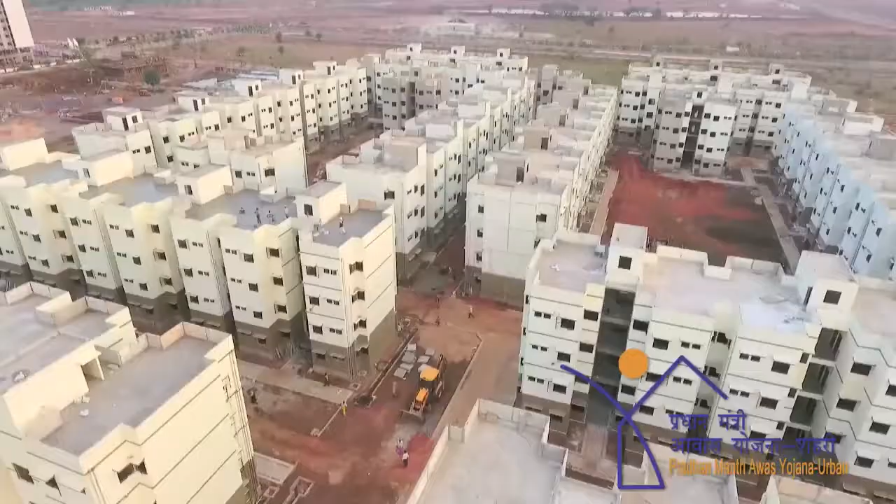The Pradhan Mantri Awas Yojana Urban and Pradhan Mantri Awas Yojana Gramin have been initiated for urban and rural areas respectively by the Union Government, with a mission to fulfill the dream of the Honorable Prime Minister of India to provide a decent 2-room Pakka house with electricity, water and toilet facility to every household of the country by 2022, the 75th year of independence of the country.

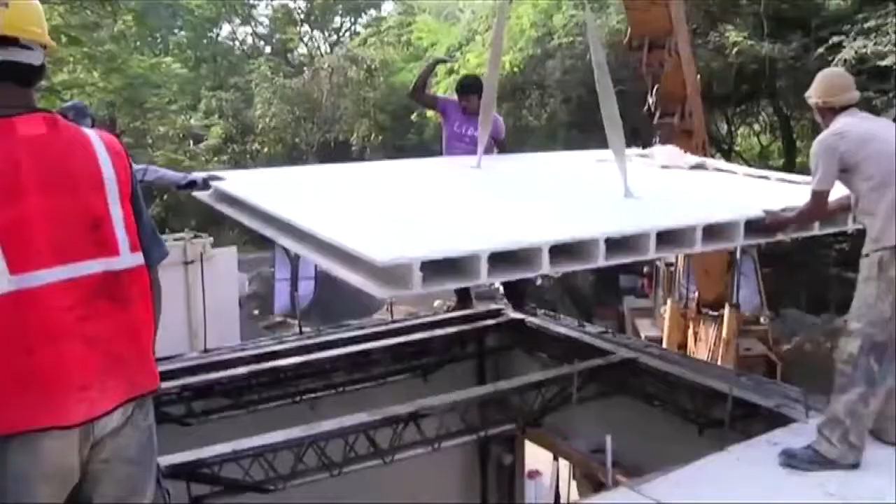This challenging task requires an integrated approach to deal not only with land, finance, regulatory mechanism, but also use of appropriate building materials and construction practices so as to ensure fast-track delivery of affordable, quality and durable houses.

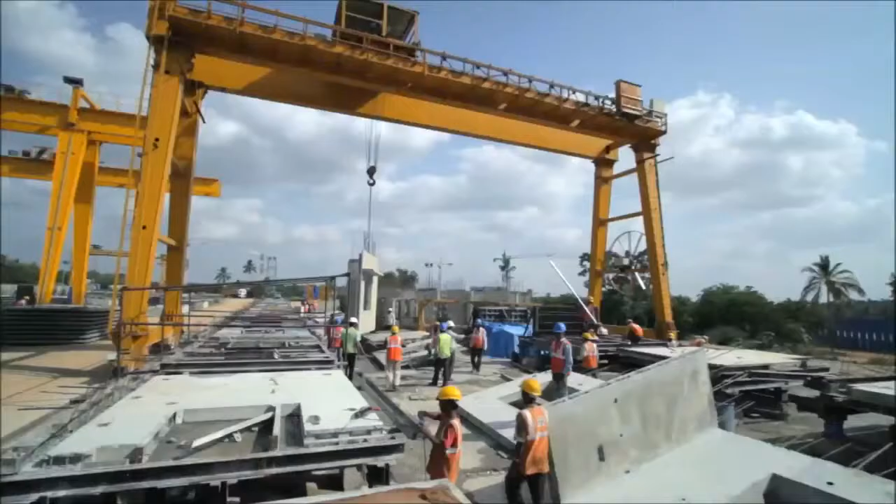A number of alternate construction techniques and practices showing potential for mass housing construction, evaluated and recommended by Building Materials and Technology Promotion Council, are being used in construction of houses in different parts of the country. Monolithic concrete construction using modular formwork system.

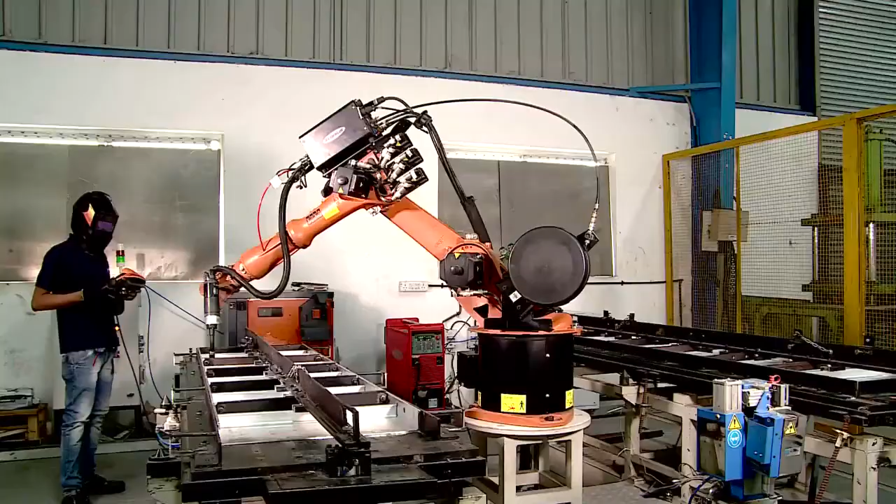One such technology is monolithic reinforced concrete construction using modular aluminium composite formwork system. Originated from Malaysia as Mivan Formwork, it is now being manufactured in the country and also imported by many agencies in the country. Aluminium formwork is the most widely used formwork system globally for a wide range of construction practices.

The system is used for forming cast-in-place monolithic reinforced concrete structure of high-quality standards with rapid construction cycles. The system enables one to cast walls, beams, columns, stairs and deck of concrete home in one continuous pour. The windows and door openings are cast in place simultaneously with the walls and ceilings.

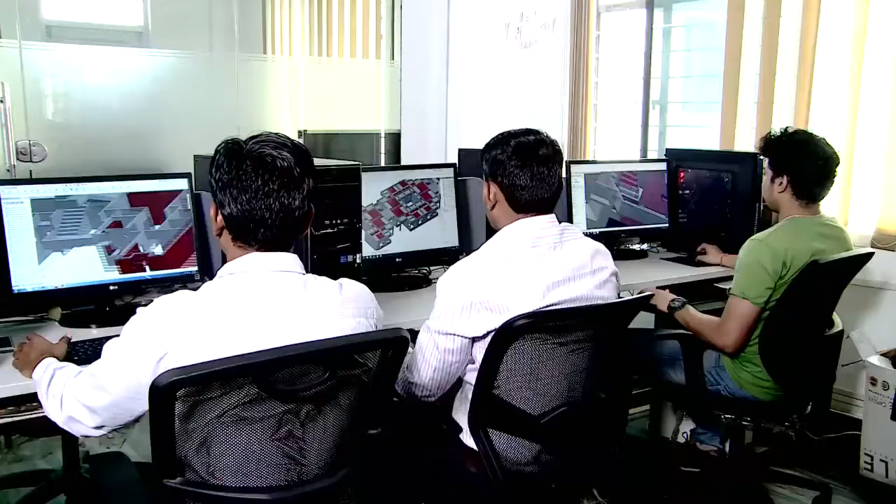MEP services can be placed into the walls before pouring of concrete, preventing the need of additional framing in the interior of the building. The structure is designed as RC load-bearing shear walls and slabs. Monolithic casting of slabs along with RC walls results in box-type structure, which is very strong and resisting horizontal forces due to wind and earthquakes.

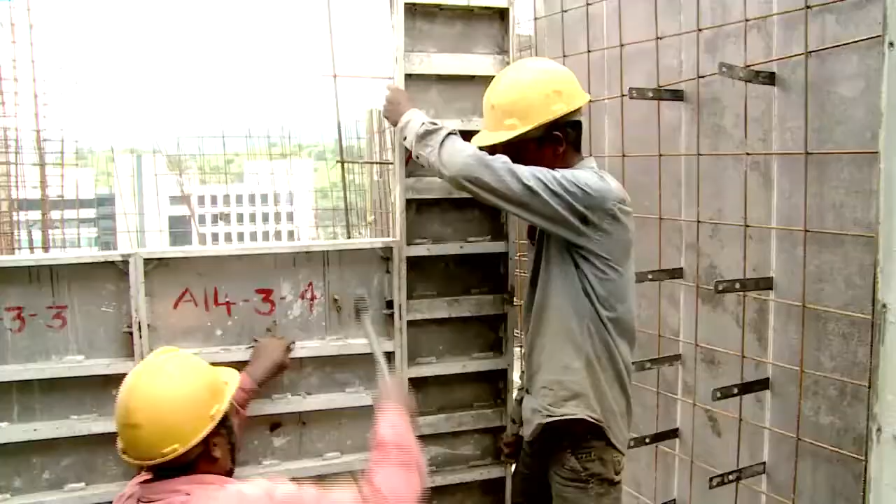The engineered formwork system is designed based on the drawing of this structure and manufactured in the factory. While transporting, all panels are clearly labeled for easy identification on site and smooth fitting using formwork modulation drawing. The basic components used are panel, extruded aluminium or composite rail section, welded aluminium composite sheet made of high-strength aluminium alloys with 4 mm thick skin plate and 6 mm thick ribbing behind to stiffen the panels.

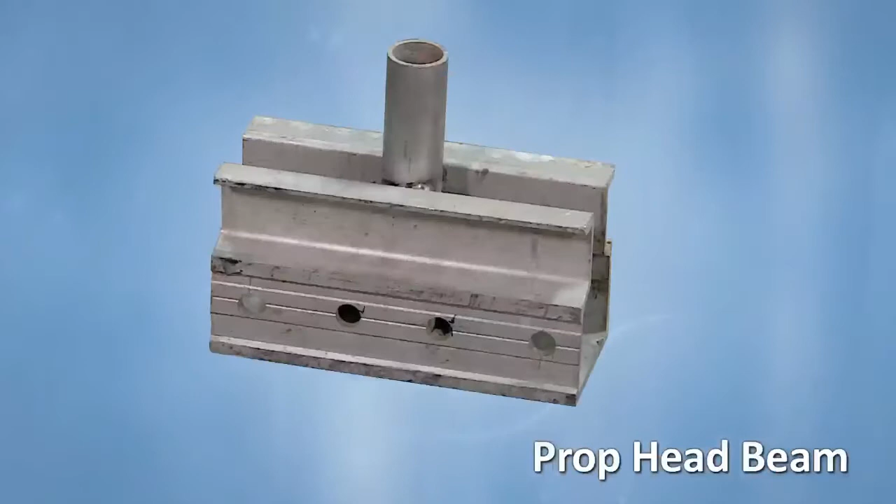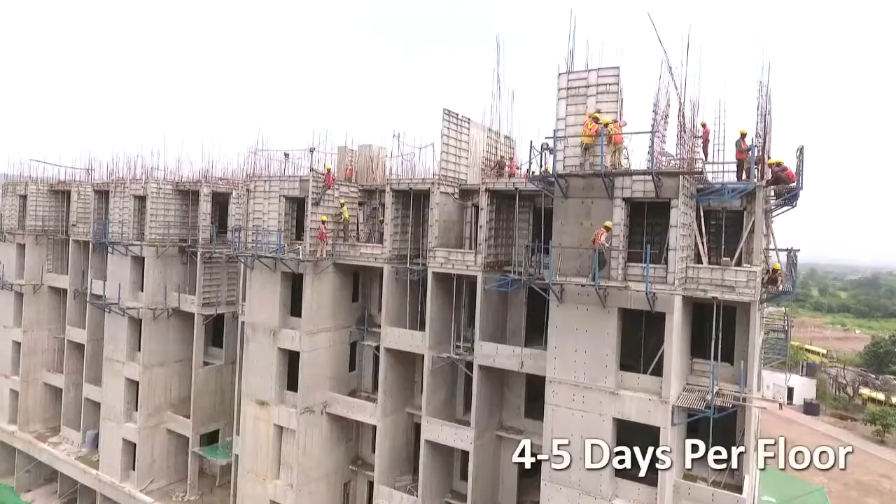Beam components: prop head beam, side panel, soffit panel beam, soffit bulk head. Deck components: deck panel, deck prop, prop length, deck mid beam, soffit length. Other components are internal soffit corner and external soffit corner. It works on rapid construction cycle with production line process approach. Typically 4 to 5 days per floor is the build cycle achieved. In case of double or single story house, build cycle is sometimes 1 house per day.

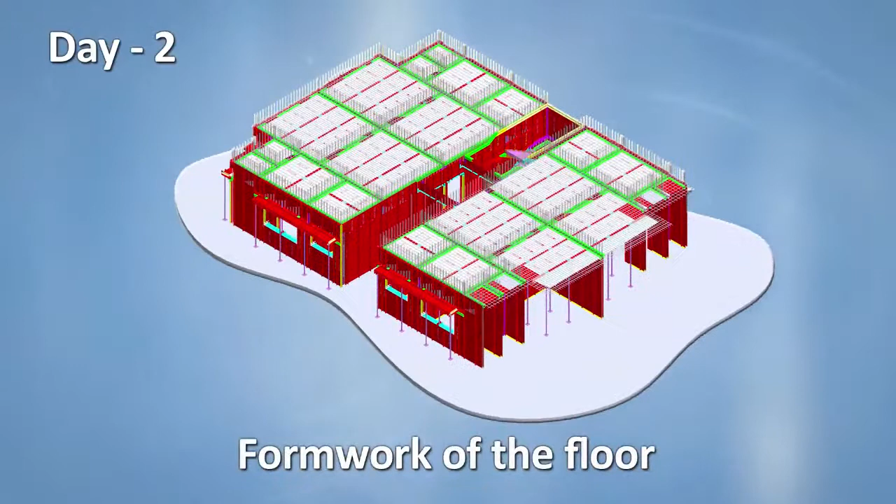Day 1. Erection of vertical reinforcement and one side of vertical formwork for the entire floor. Day 2. Erection of second side of the vertical formwork and formwork of the floor. Day 3. Fixing reinforcement bars for floors and slabs and casting of walls and slabs. Day 4. Removal of vertical formwork panels, leaving the props after 24 hours and moving to another floor.

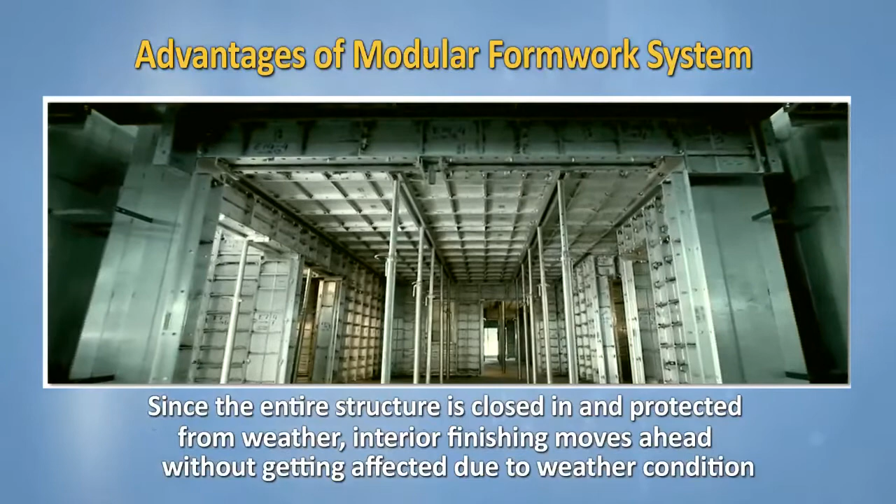Advantages of modular formwork system: specially designed to allow rapid construction of all types of architectural layout. For same built-up area, more carpet area is achieved compared to conventional brick masonry. Since the entire structure is closed in and protected from weather, interior finishing moves ahead without getting affected due to weather condition. Erection does not require highly skilled laborers when forms are stripped, walls are complete and ready for treatment.

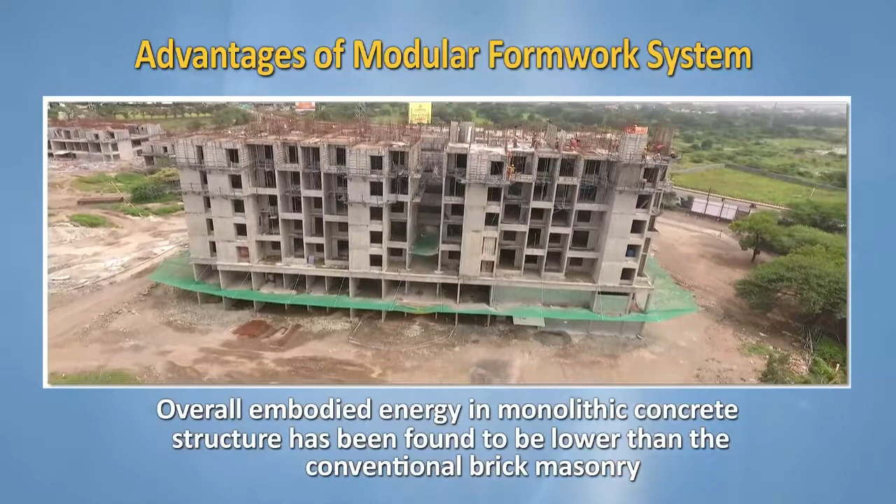With proper use, more numbers of repetition possible. It is recyclable after use. Scrap value is also high. Less debris generated. Overall embodied energy in monolithic concrete structure has been found to be lower than the conventional brick masonry.

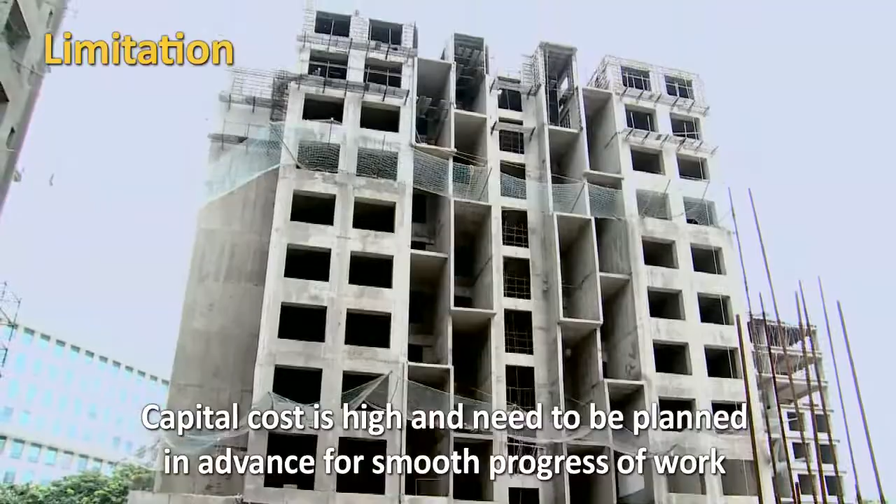Limitations of modular formwork system: requires uniform planning as well as uniform elevation to be cost effective. Lead time of about 3 months required to initiate the construction. Capital cost is high and need to be planned in advance for smooth progress of work. Curing requirement increases. If only OPC is used, due to box-type construction, shrinkage cracks will be more. Post-construction modification not possible. Large volume of work needed to be cost-effective. Larger the repetition, cheaper is the cost.

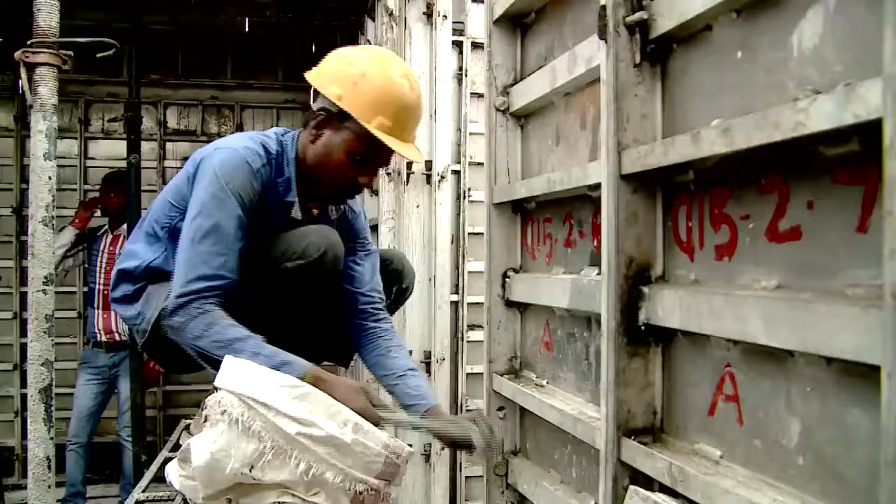The formwork system has emerged as one of the accepted emerging technologies for mass housing. In spite of some limitations, which can be overcome easily with proper planning, this construction system brings speed, quality, durability and economy in construction. Such systems are key to meeting the demand for efficient, sustainable mass housing. Prefabricated concrete construction.

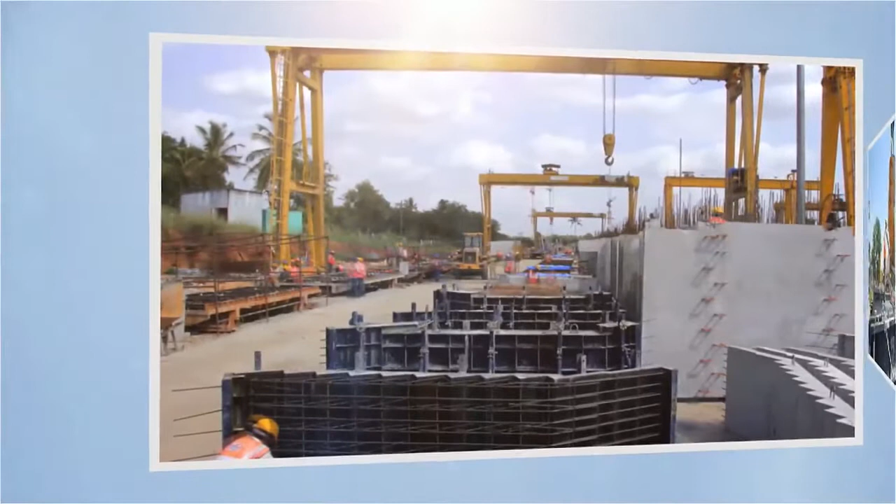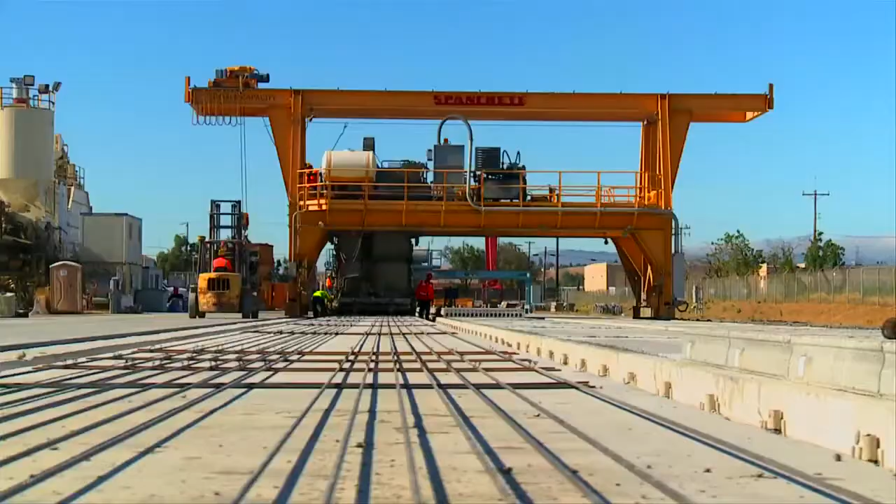Precast or prefabricated concrete construction, as is popularly known, includes those buildings where the majority of structural components are standardized and produced in a controlled environment at a factory or manufacturing site in a location away from the proposed building and then transported to the site for assembly.

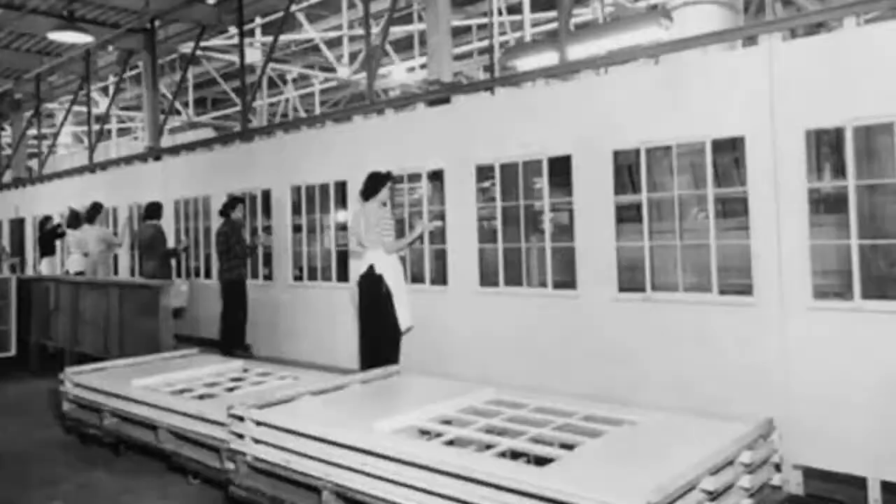Originally developed in countries of Northern Europe, precast construction is one of the world's most common and resource-efficient ways to construct a building. Various types of prefabricated systems, methods of construction of buildings in certain order and discipline, have been used after the Second World War in Eastern European and former Soviet Union republics.

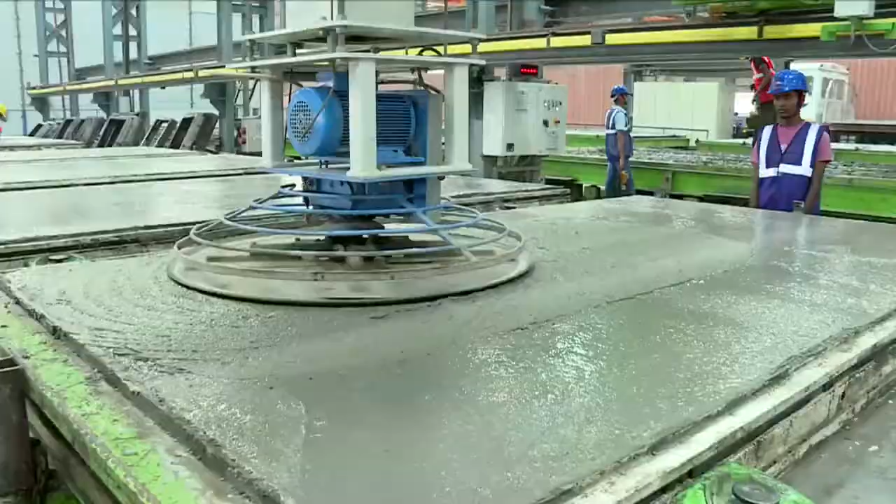With a massive plan of building houses in a short span of time, amongst various options available, precast prefabricated concrete construction systems are seen to be a viable time-tested alternative. Four different types of precast prefabricated concrete construction systems have been used for mass housing in the country now. The industrialized RC frame systems with walling elements.

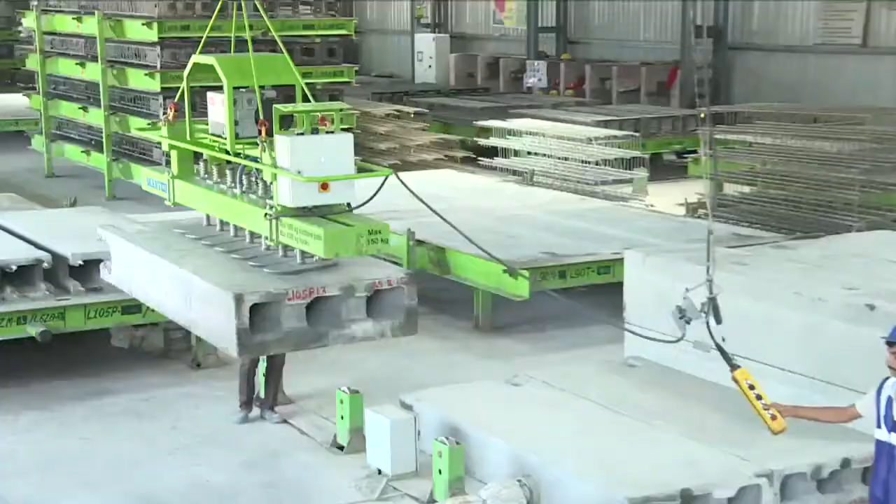Precast RCC framing elements such as columns, beams and stairs are used to form the framed structure. The reinforced precast solid slabs for floors and roofs may be of normal weight or lightweight concrete. The main framing elements, that is columns, beams and slabs, are partially precast for about 60 to 75% of their overall final cross sections to facilitate wet jointing for intended structural integrity.

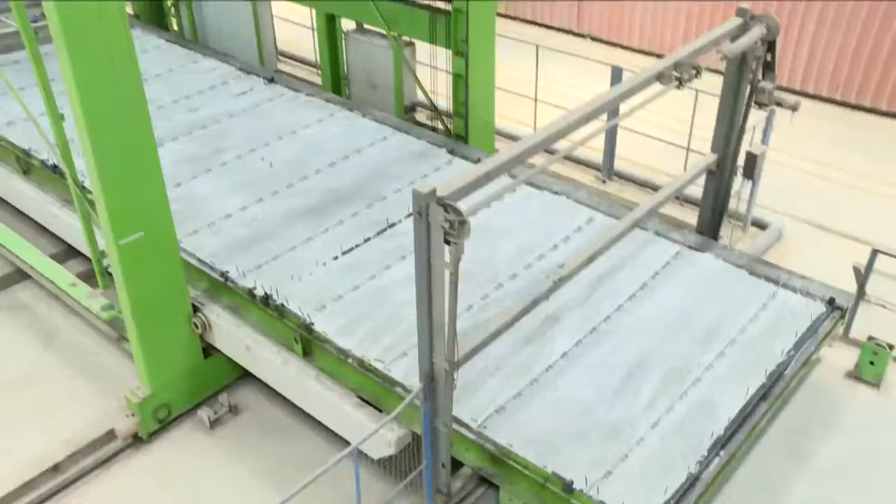Other RCC precast elements such as shear walls, lift shafts and service ducts are integrated into the frame skeleton depending upon seismic design demand, height and configuration of the structure. The frame structure, once erected, does not look different than any other concrete structure.

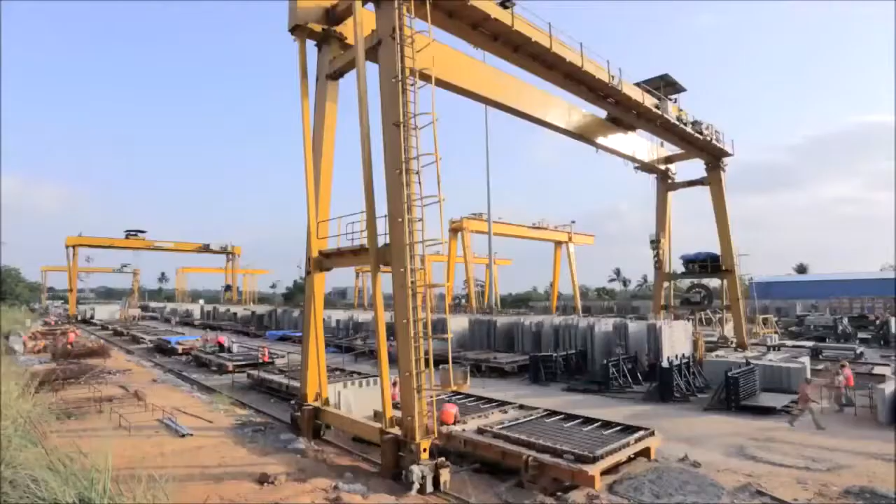Precast large panel system. It is large wall and floor panels connected in the vertical and horizontal directions so as to enclose appropriate spaces for rooms within a building. Horizontal floor and roof panels span either as one-way or two-way slabs. When joined together, horizontal elements act as diaphragms that transfer lateral loads to walls.

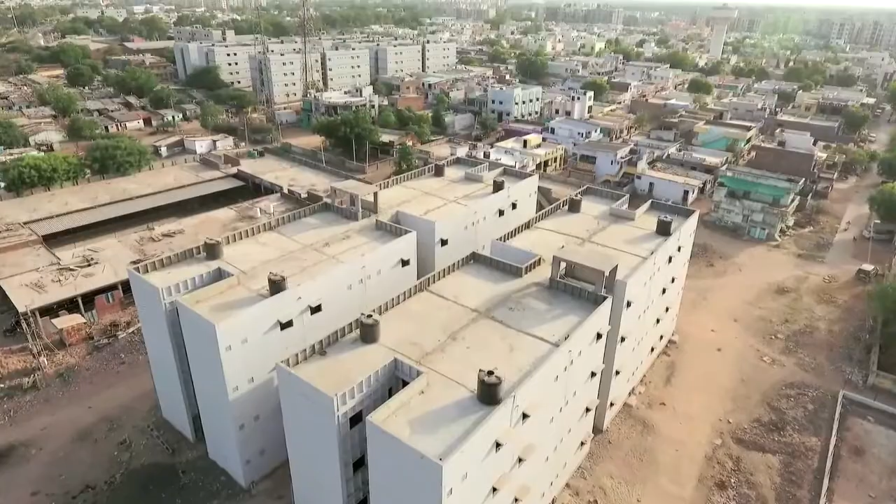Waffle-crete system. Structural ribbed load-bearing panels of reinforced precast concrete are bolted together. The joints between the panels are then caulked to form the walls, floors and pitched or flat roof of the building. Mixed system. In this, pre-stressed hollow core slabs are used as roofing and precast elements for walling.

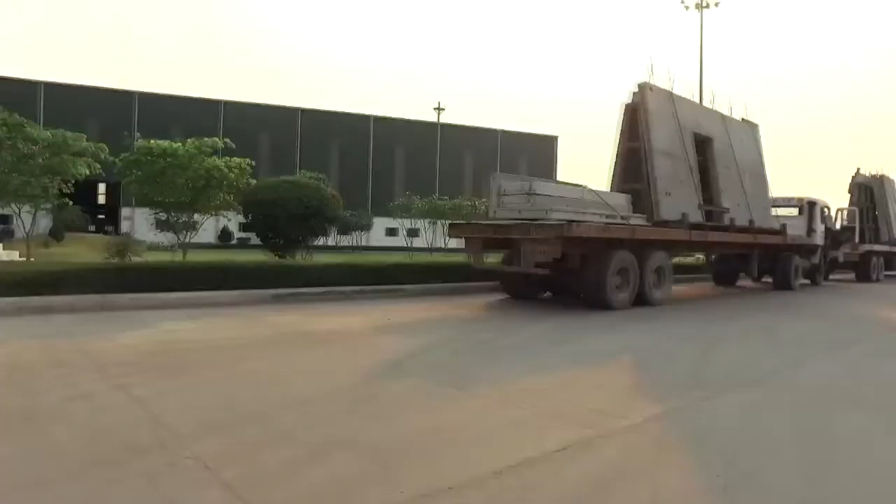The design concept of precast prefabricated concrete buildings is based on buildability, economy, safety and standardization of precast components. Prefabricated buildings are designed with proper structural integrity to avoid situations where damage to small areas of a structure or failure of single elements may lead to collapse of major parts of the structure.

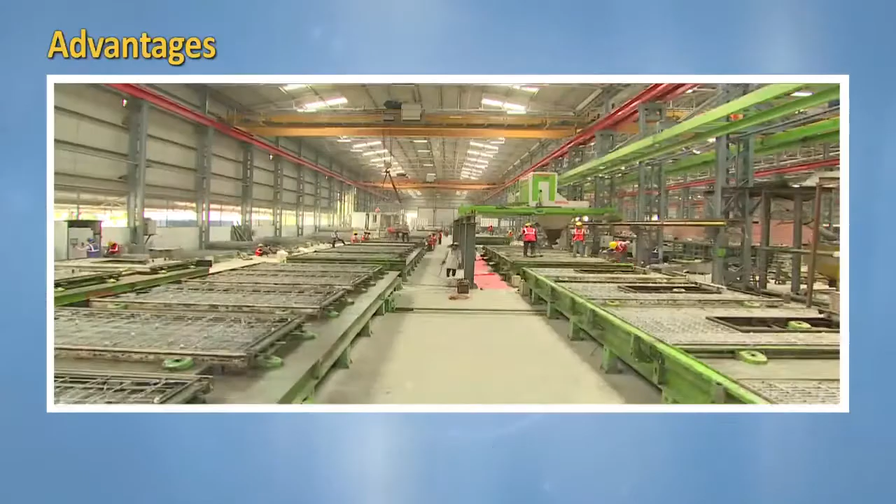Prefabricated concrete construction brings more resource efficiency and flexibility compared to cast in-situ construction. Controlled environment ensuring quality in production. Environment friendliness by reduction of wastes. Possible uses of industrial wastes in concrete and reduction in use of water and cement. Safer and healthier environment. Reduction in dust and noise pollution at construction site.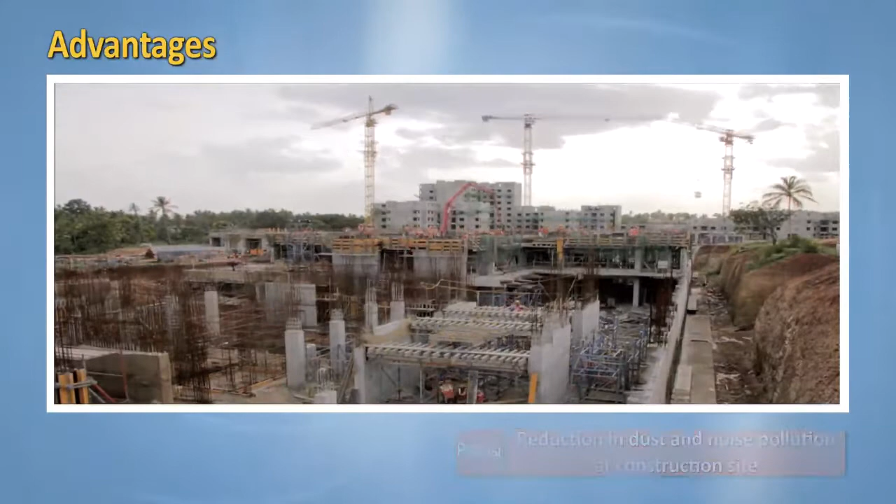Ease of working in all weather conditions. Structural efficiency. Quality and durability in structure. Speed in construction, ensuring faster delivery. Overall economy.

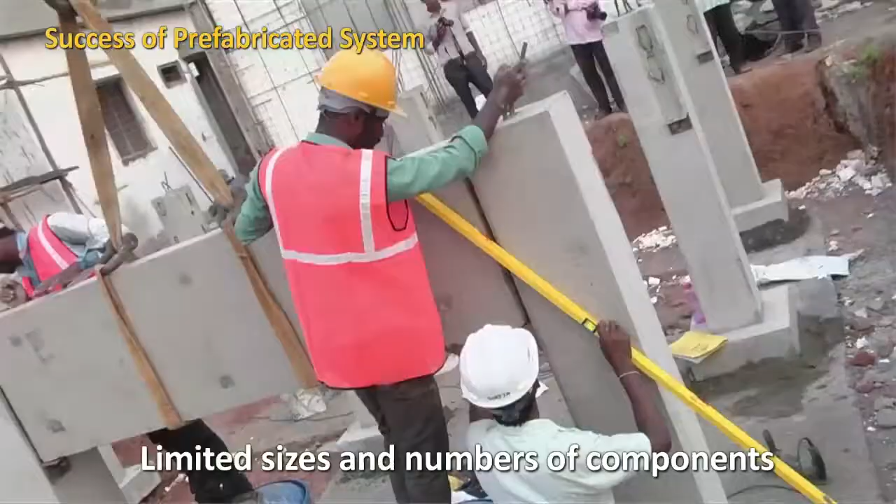Success of a prefabricated system depends on effective utilization of spaces, straight and simple walling system, limited sizes and numbers of components, limited openings in bearing walls, regulated locations of partitions, standardized service and stair units, limited sizes of doors and windows with regulated positions, structural clarity and efficiency, ease of manufacturing, storing and transportation, speed and ease of erection and simple and effective joining system.

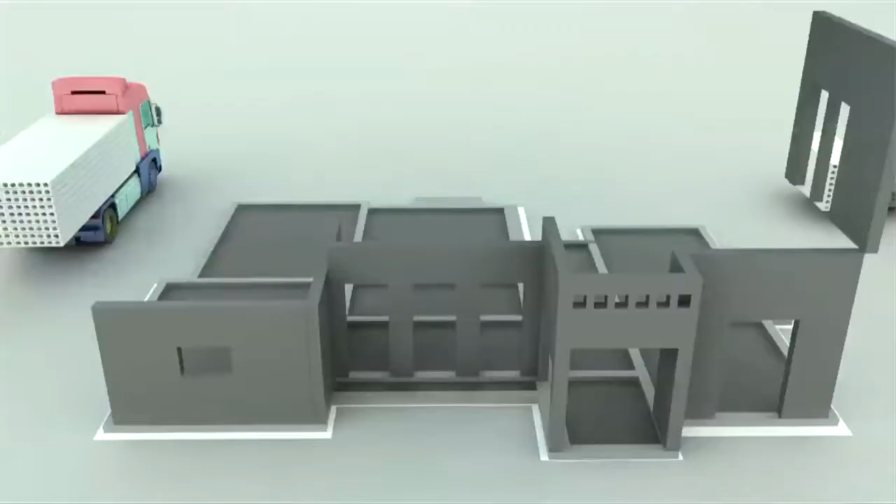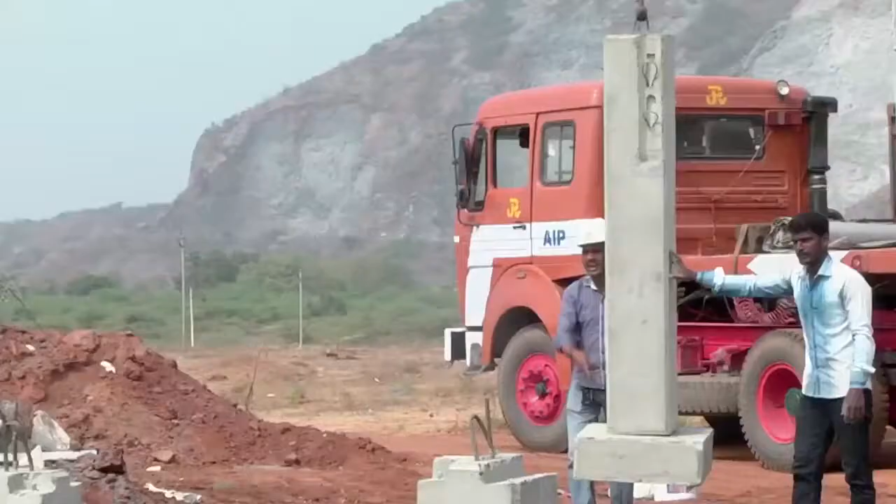CPWD has already adopted prefabricated concrete construction systems and is using them in their projects. Indian Standards also give provisions for design and erection of buildings using prefabricated concrete. National Building Code 2016 also covers provisions of different prefab systems for construction of buildings. The keys to successful implementation lie in the careful planning and understanding of the close relationship between design, construction, detailing, execution and manufacturing of precast components.

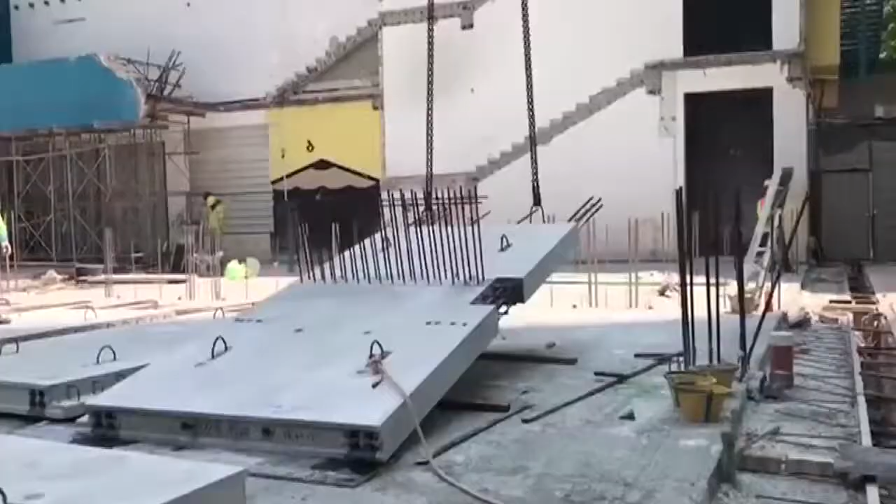With backing of performance evaluations by BMTPC, National Standards and National Building Code, CPWD Schedule of Rates and related guidelines, and a number of successful projects in the country, prefabricated concrete construction provides a very good option for the housing agencies in the country to construct quality and durable houses in a fast-track manner to fulfill the requirement of providing shelter to all. Light gauge steel structures.

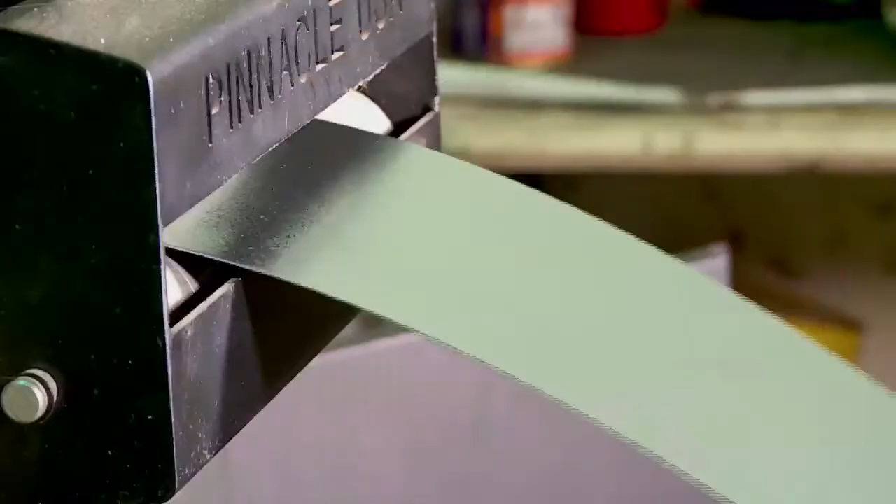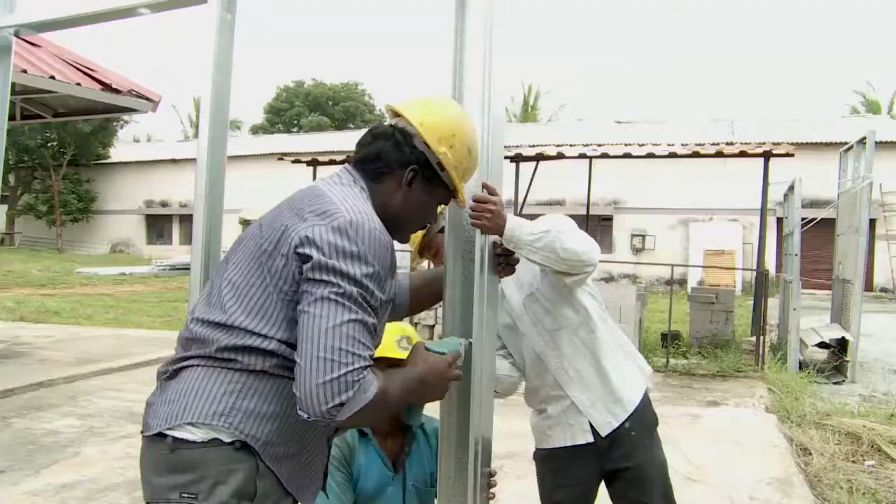Light gauge steel sections are formed in cold state from galvanized steel sections of thickness usually ranging from 1 mm to 3 mm. Galvanizing of the preformed coil provides satisfactory protection against corrosion in extreme environments. It is a well-established technology for residential construction in North America, Australia and Japan, and is now gaining ground in India because of its versatility and suitability for a range of lighter load-bearing applications.

The system is based on erection of a base structure by assembly of factory-made cold-formed galvanized light gauge steel sections and subsequently fixing of paneling materials to form walls and floors with and without insulating materials.

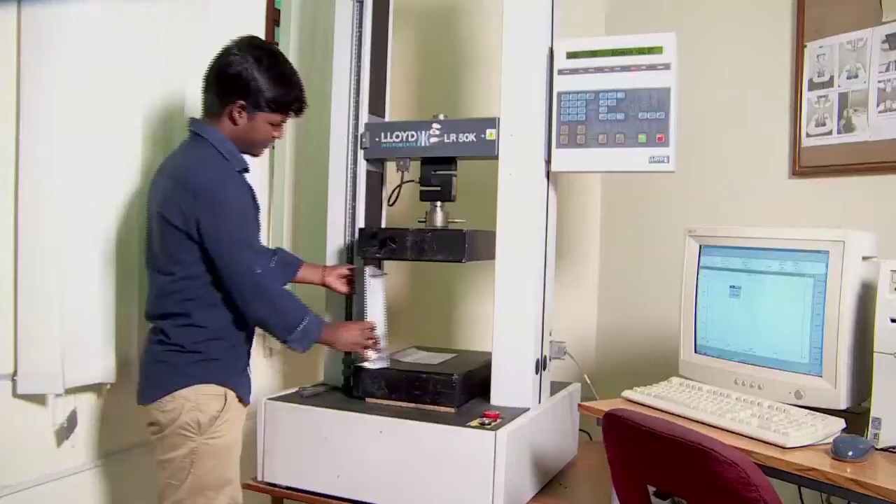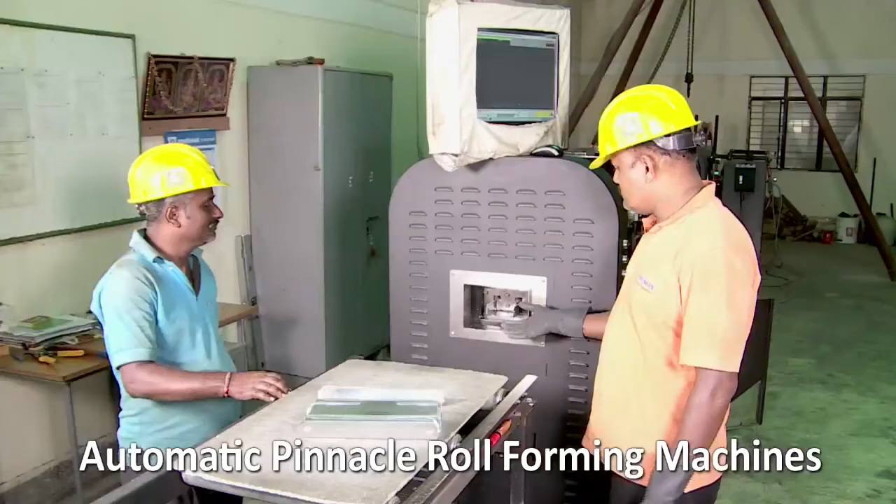Once designed as per relevant Indian IS 801 or International Codes BS 5950, the required sections of stud, C-sections with knockouts, dimplings, slots, service holes etc. as vertical members and U-shaped tracks as horizontal members are cold-formed in computer numerical control (CNC) automatic roll forming machines with production speed of 300 to 450 m/h with very high precision. Once out of the machine, the sections are properly numbered, stacked and transported to the construction site as a package.

Foundation for lightweight steel framing is essentially the same as for any form of construction, although dead weight applied will be much lower compared to conventional construction of brick masonry and RCC. Hence, heavy foundation may not be required.

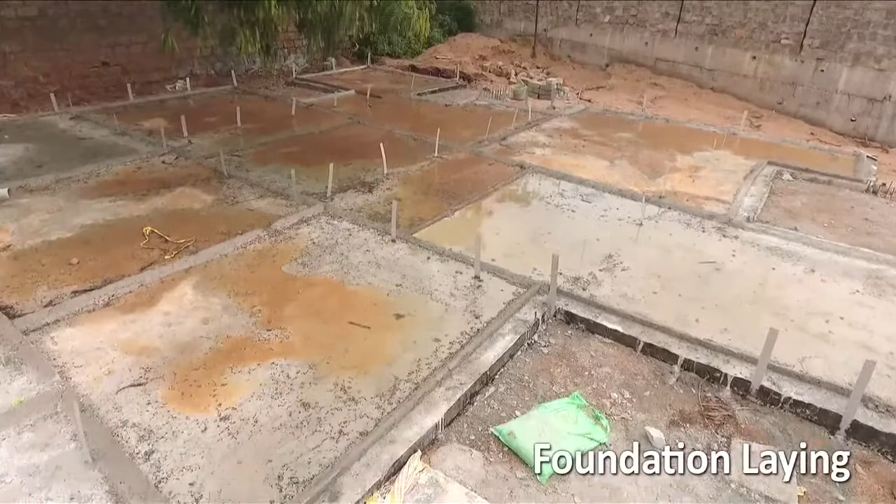Sequence of construction is foundation laying, fixing of tracks, fixing of wall panels with bracings as required, fixing of roof panels, decking sheet, fixing of electrical and plumbing services, and finally fixing of walling materials and finishing of roofs with insulation. Profiles are assembled by trained team at the construction site in line with architectural plan. Special self-drilling tapping screws and fasteners are used for joining different members.

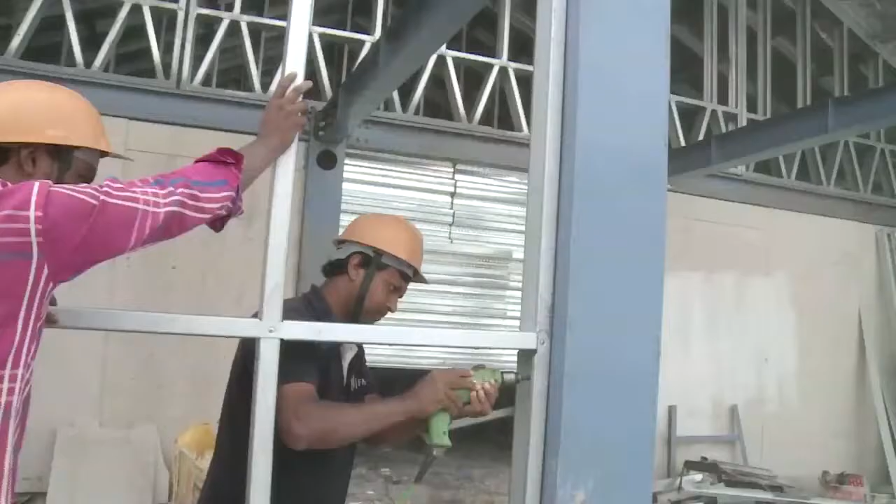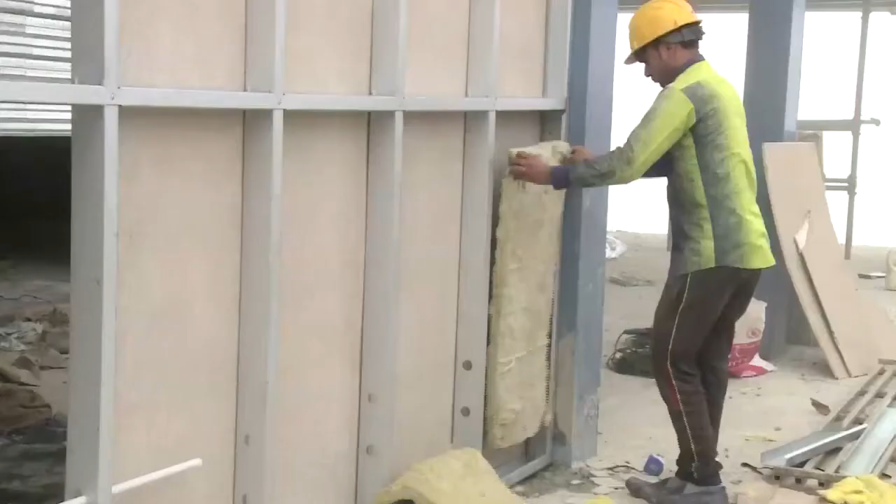Walls are either made fixing infill of type A cement fiber board conforming to IS 14862 in combination with gypsum board conforming to IS 2095 Part 1, or fixing precast concrete panels and filling with lightweight concrete, mineral wool, rock wool in the gap between the two panels. High-density polystyrene core plastered on both sides using wire mesh may also be used. There could be other options for infills also depending upon the requirements.

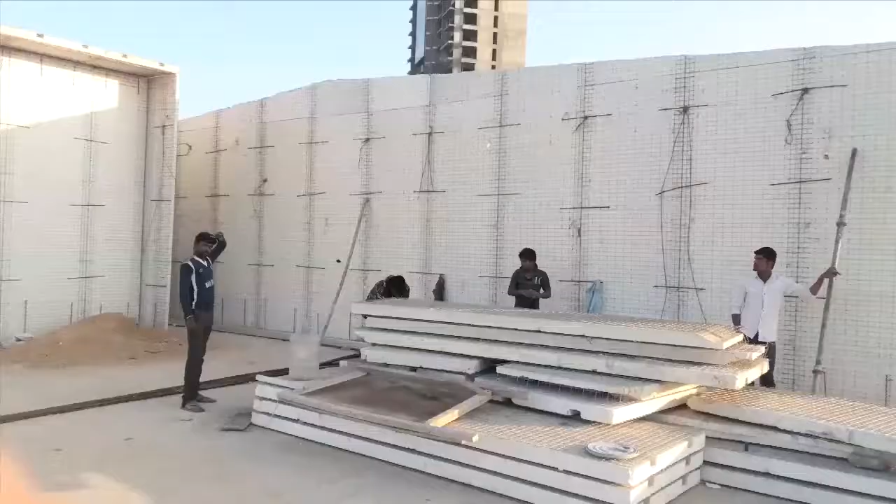With very high precision of production of the structural sections made of galvanized sheet and other components also of appropriate high grade, the well-designed structure made using this system brings durability and quality in construction. With pre-engineered steel sections which can be fully recycled, it is environment-friendly and brings speed in construction with overall economy. CPWD has also adopted this technology and incorporated analysis of rates for LGS in Delhi Schedule of Rates.

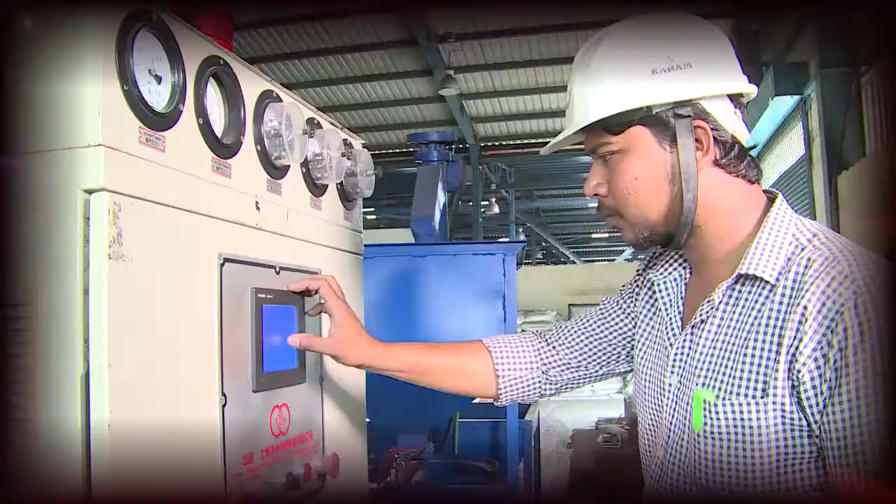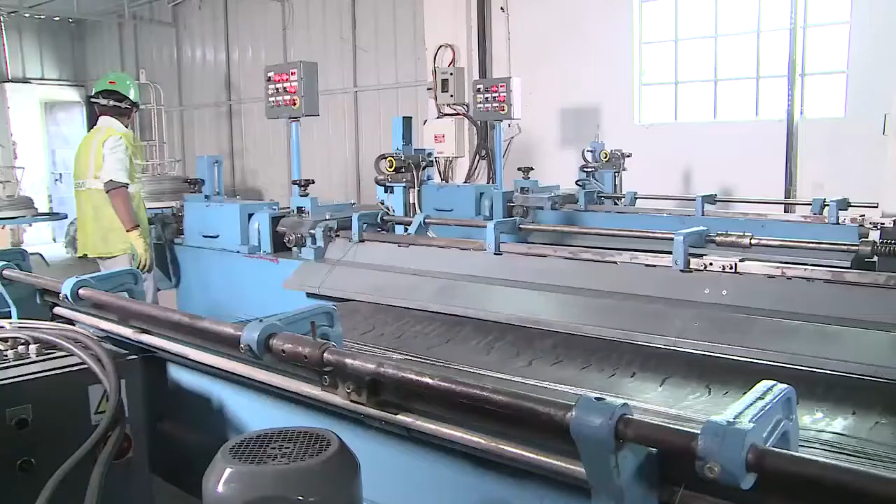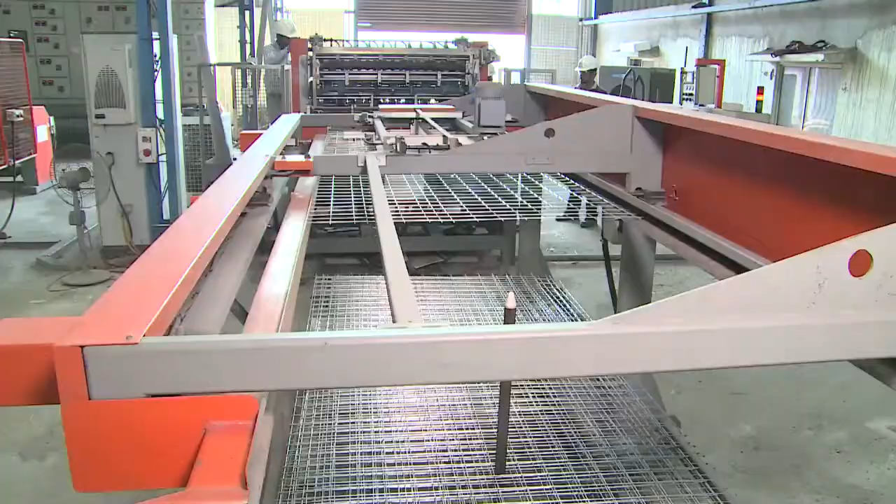EPS-based panel system. The EPS technology is in use in many countries under different forms and brand names. The system is basically based on factory-made composite panel consisting of combination of self-extinguishing polystyrene corrugated plain sheet of minimum density 15 kilograms per cubic meter and required thickness, sandwiched between two layers of engineered sheet of high-strength galvanized cold drawn steel wire mesh interconnected to each other with high-strength steel connectors.

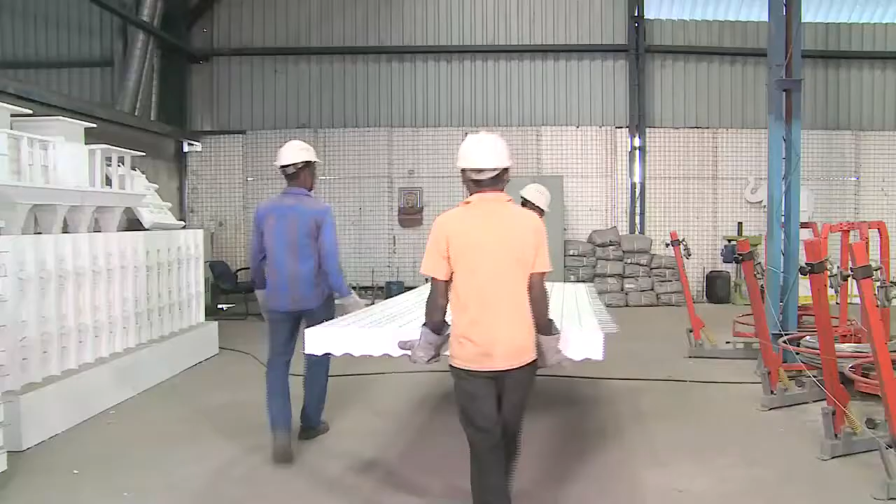The main function of the core is to provide thermal and sound insulation, and its thickness and type depend on its thermal resistance and design temperature. The truss formed with the galvanized wires gives the desired structural strength to the panel. The EPS panels are manufactured in different types depending upon the application. The key components of a building arrive on-site packaged according to size and construction sequence. The building site is prepared and a strip or raft foundation as needed put in place.

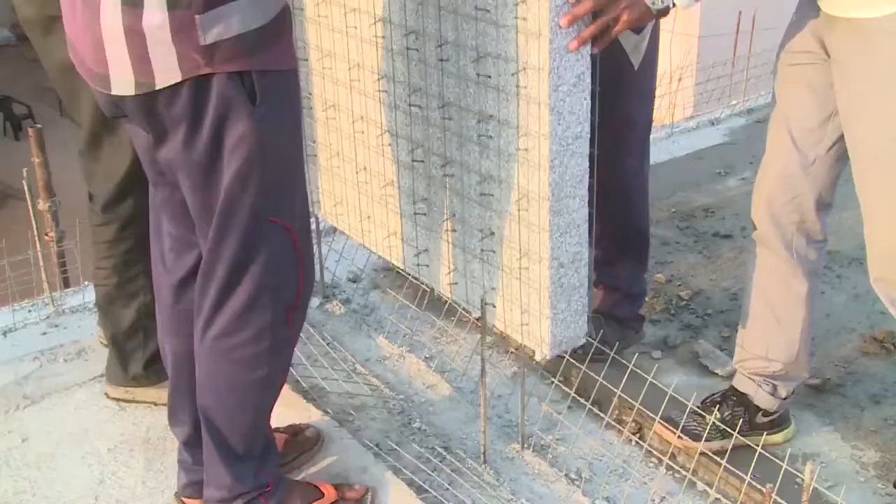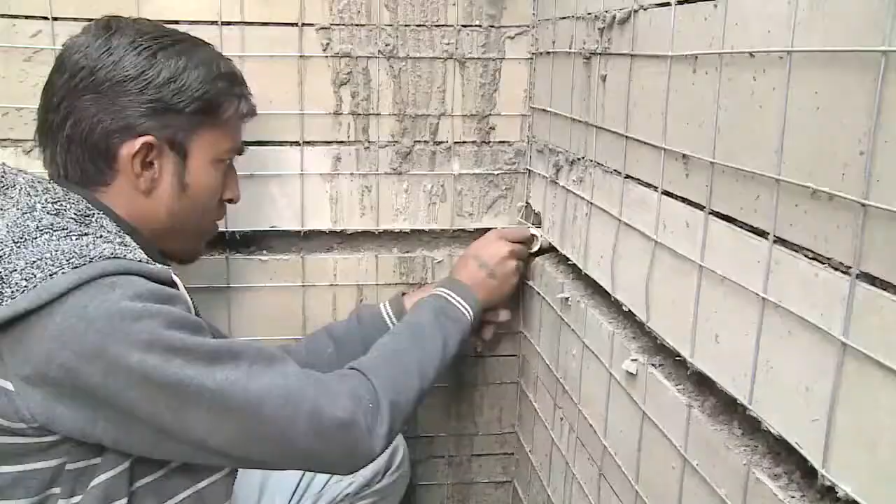The walls are vertically connected to the concrete structure and to the floor of the upper level by means of deformed steel dowels. The erection of walls is completed by strengthening each joint and corner and openings with additional wire mesh. The roof panels are secured to the walls using special steel sections, fixings and fasteners. Provisions for door and window openings are pre-cut to fix the required door and window frames. Plumbing and electrical services are fixed through the depressions created in polystyrene core using blowtorch.

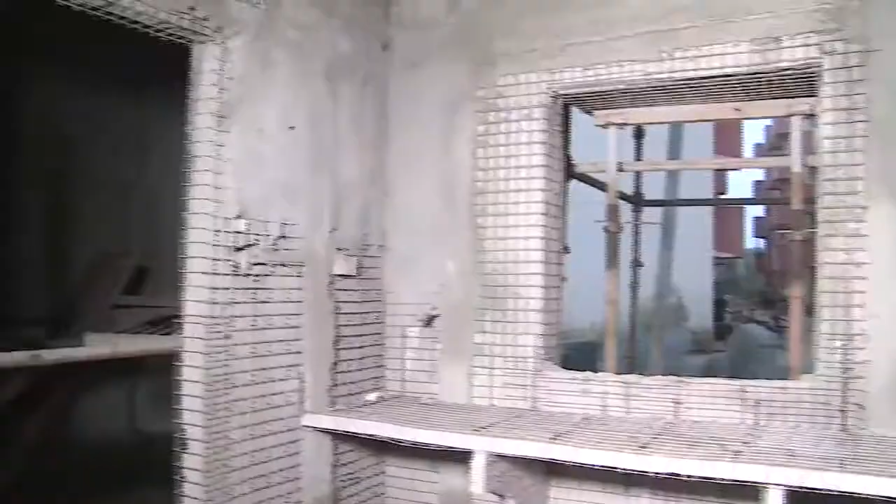The structure is finished on site by pouring or spraying concrete of appropriate grade and thickness to realize the different structural elements like walls, slabs and floors. The innovation lies in panels manufactured in a controlled environment in a factory setup with very high strength to weight ratio, attracting very low seismic forces, which are easy to erect at site with minimum workforce. It fulfills requirements of strength, durability and energy efficiency.

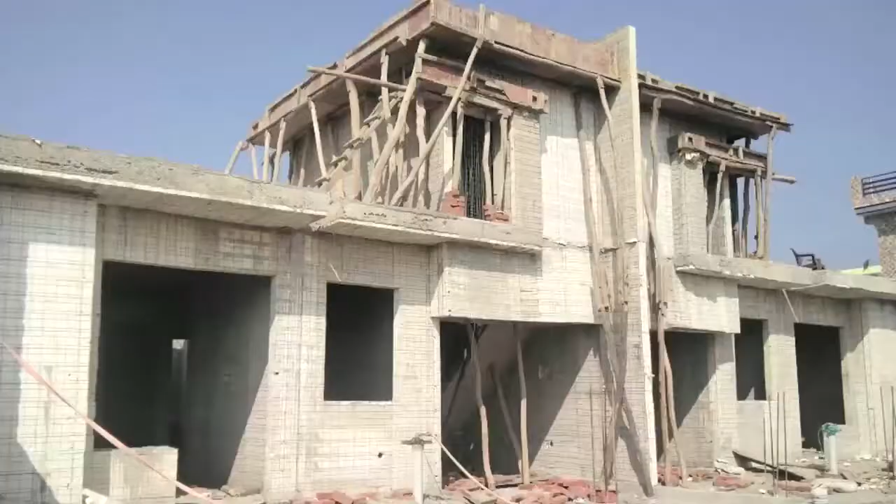When it's finished, a structure constructed using EPS panel-based technology looks solid as in conventional construction. EPS concrete wall panel buildings are environment-friendly and aesthetically appealing, a system that meets the needs of designers and resolves the difficulties of construction companies.

They can be constructed quickly, resulting in tremendous savings in time and money. Research indicates that the materials themselves have a life expectancy of at least 50 years. From an architectural perspective, these homes offer a high degree of flexibility in floor plan design and aesthetic treatment.

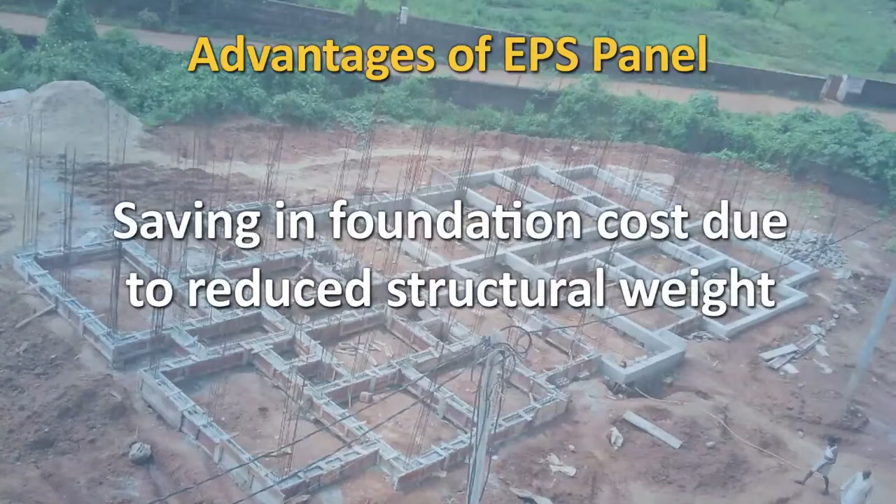EPS panels have many advantages: reduction in construction time, lightness, handling and transportability, seismic resistance, cyclone resistance, integration with other systems, fire resistance, thermal insulation and sound insulation, saving in electricity consumption, saving in foundation cost due to reduced structural weight. Stay-in-place formwork systems.

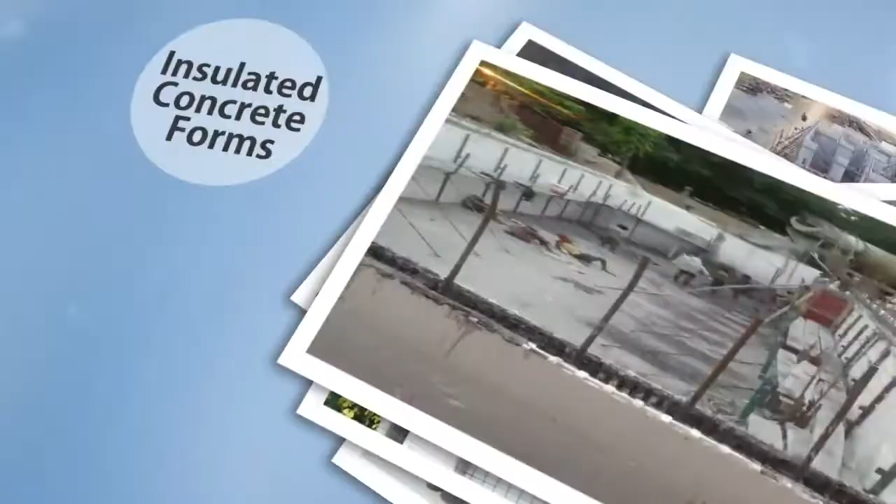Many new formwork systems have been developed, amongst which stay-in-place formwork systems have many advantages. After concrete pouring and hardening, this type of formwork system remains in place as an integral part of the structure and contributes to the structural integrity, durability, and even aesthetics of concrete elements.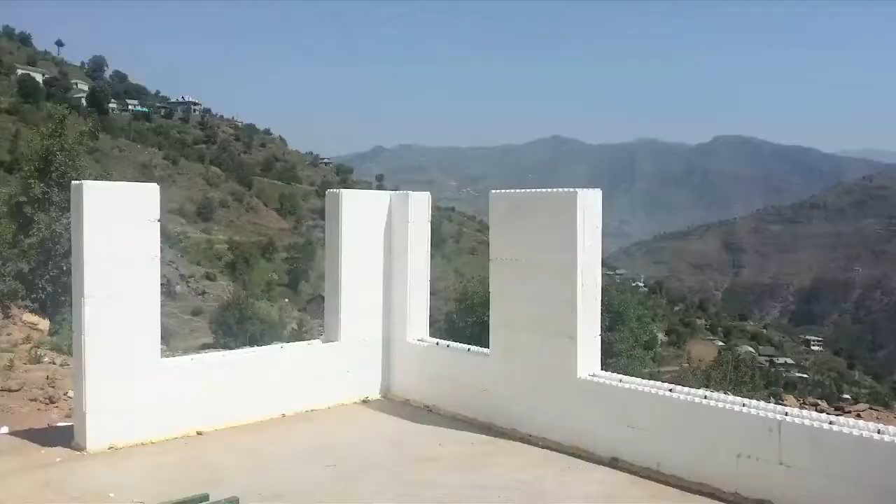3 different stay-in-place formwork systems evaluated and recommended by the Building Material and Technology Promotion Council for mass housing include Coffor System, expanded polystyrene double wall system, and insulated EPS interlocking blocks concrete formwork. Coffor System.

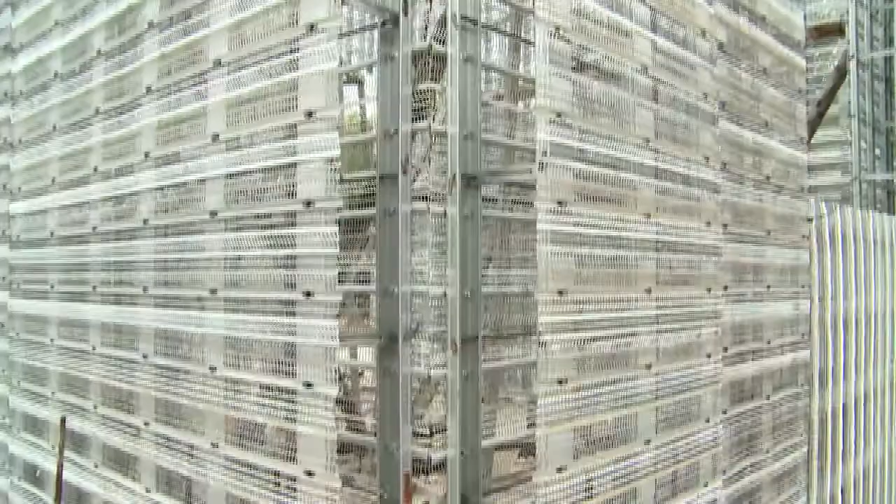The formwork is composed of 2 filtering grids comprising rib meshes made of galvanized plain steel GP sheets with herringbone mesh pattern rib lath, reinforced by C-profile GP sheet vertical stiffeners. These grids are further connected by articulated horizontal MS rebar loops in one direction and cold-rolled close-annealed plate GP horizontal connectors in the other direction.

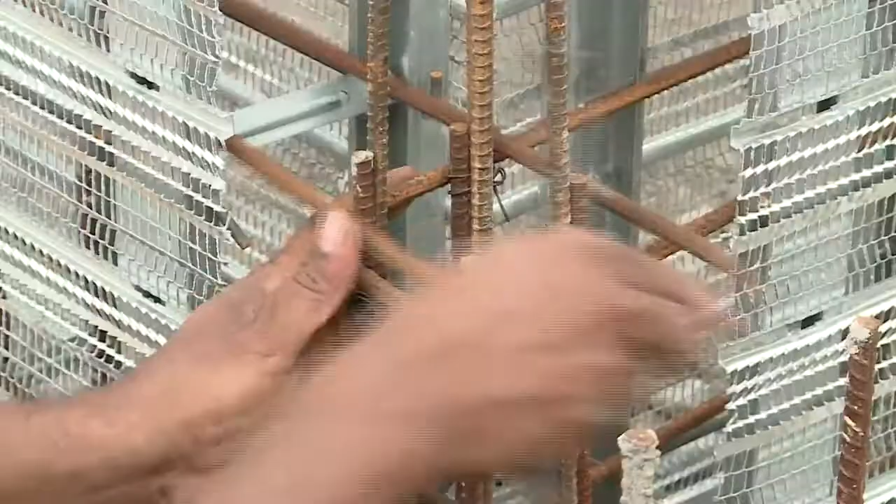After the erection of formwork panels in alignment over strip foundation, closing of corners, edges of doors and windows frames, and rebar positioning, concrete of required grade is poured inside the panels, either using pump, bucket or shovel loader. The inside and outside walls are finished with cement plaster of suitable grade.

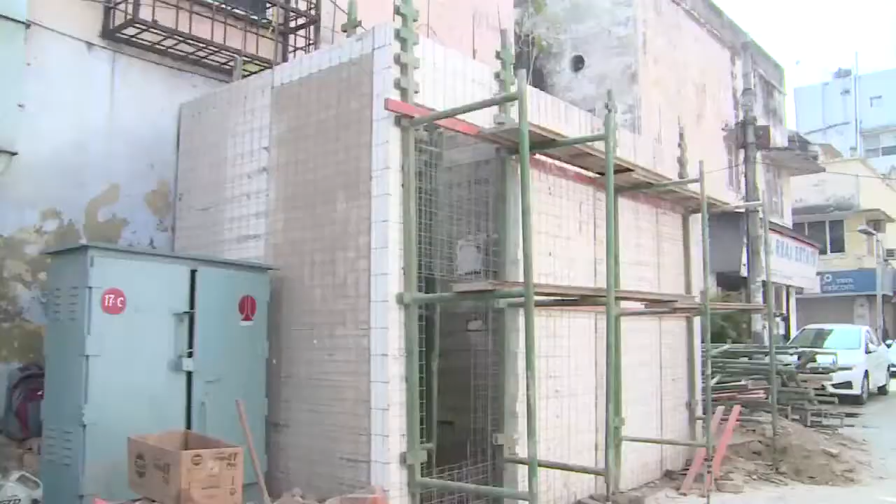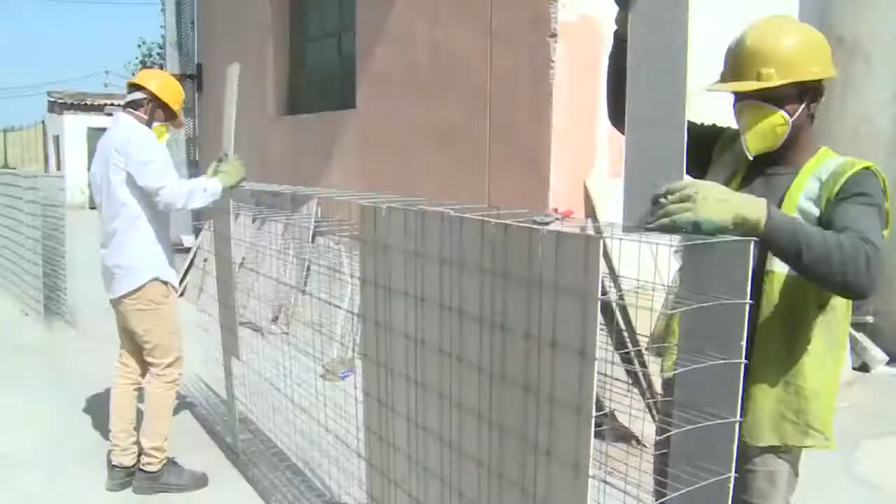EPS double wall system. It is an insulating shuttering kit made in factory for the whole building based on a 3-dimensional lattice made of high-tensile galvanized steel wires. At the exterior side of the lattice, high-density fire-resistant grade expanded polystyrene panels are inserted, which transforms the lattice into a closed structure that can be filled with concrete. Other materials like mineral board can also be used depending upon the requirement and cost economy.

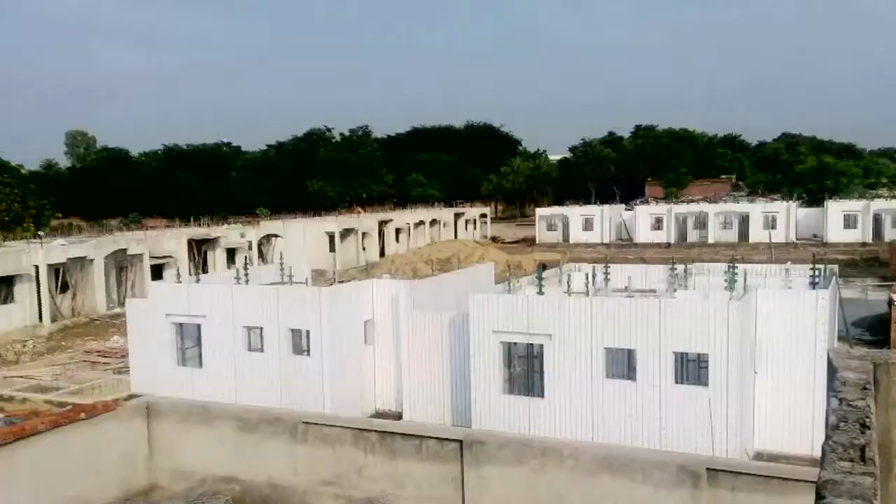The steel wire also acts as armature and anchoring for the finished materials, and it holds reinforcement bars in place during concreting. The panels are erected on foundation using dowel bars and the exterior surface is finished with cement plaster of appropriate grade. EPS-based stay-in-place formwork system has high heat-resistant property and brings down energy consumption required during winter and summer for heating and cooling. Insulated concrete forms, an American initiative, is used in Europe, America, Africa, and Southeast Asia.

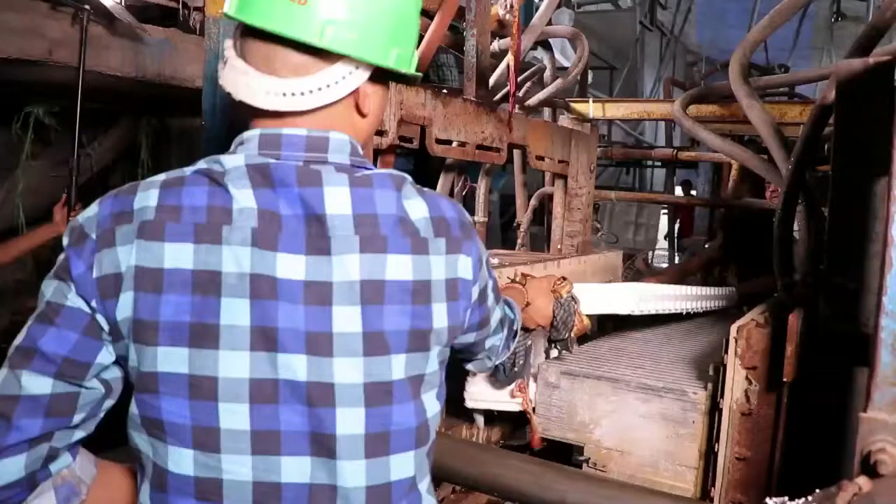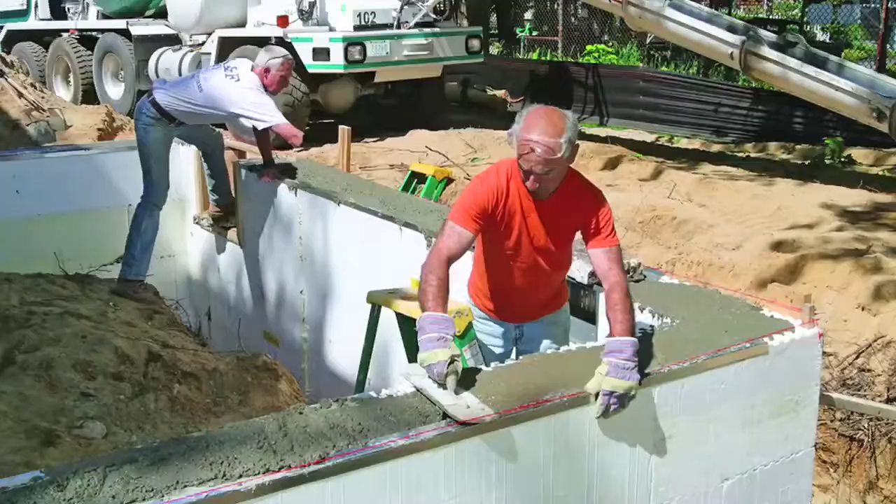Insulated concrete forms (ICF) system comprises a panel of 2 walls of self-extinguishing expanded polystyrene (EPS) of density 24 kilograms per cubic meter, separated by a nominal distance of 150 mm by hard plastic ties. The forms are open-ended, hollow polystyrene blocks which fit tightly together to form a shuttering system. These are assembled at site to hold reinforced concrete. The concrete of desired grade is poured into the hollow space to form a continuous wall.

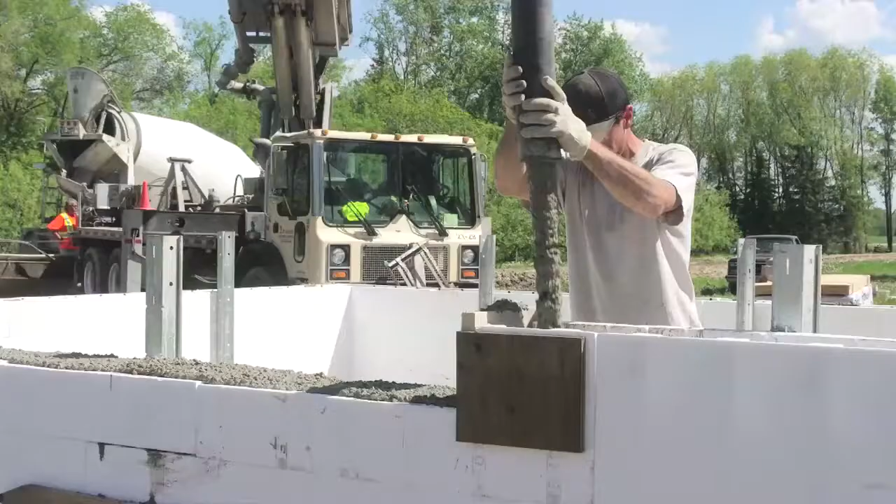When hardened, the wall supports the structural loads from floors and roofs, and the shuttering provides thermal insulation. Reinforcement as required from the design is also placed. Upper and lower surfaces of the polystyrene panels are castellated, and the vertical mating surfaces are tongue and grooved to form a tight fit when joined together. The rigid form does not require supporting falsework.

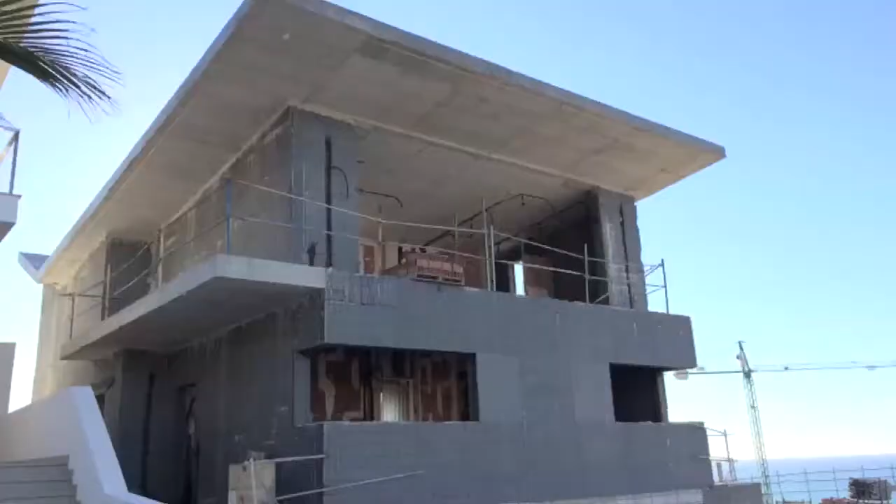Stay-in-place formwork systems are quicker, requiring less manpower and machines. These are used to form load-bearing walls, eliminating the need for columns and beams. With the use of stay-in-place formwork, the need for separate formwork is eliminated. It brings overall economy and speed in construction. The structures associated with these formwork systems are of reinforced concrete, which can be designed suitably to achieve desired strength and durability, making them safer even after natural hazards, such as earthquakes, with lesser maintenance cost.

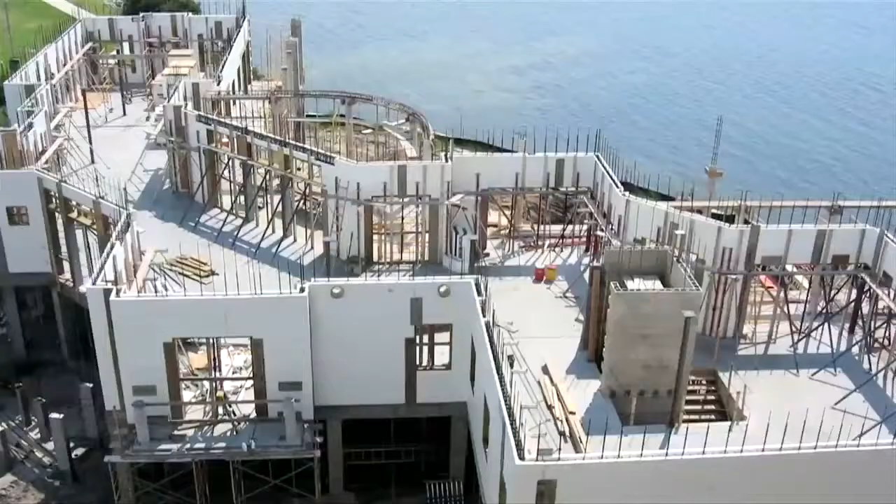With revolutionary change in formwork systems, stay-in-place formwork systems have the potential to replace conventional formwork systems and can be tried by housing agencies in the country to build affordable, safe, durable and sustainable dwelling units to achieve the overall goal of housing for all in the country.

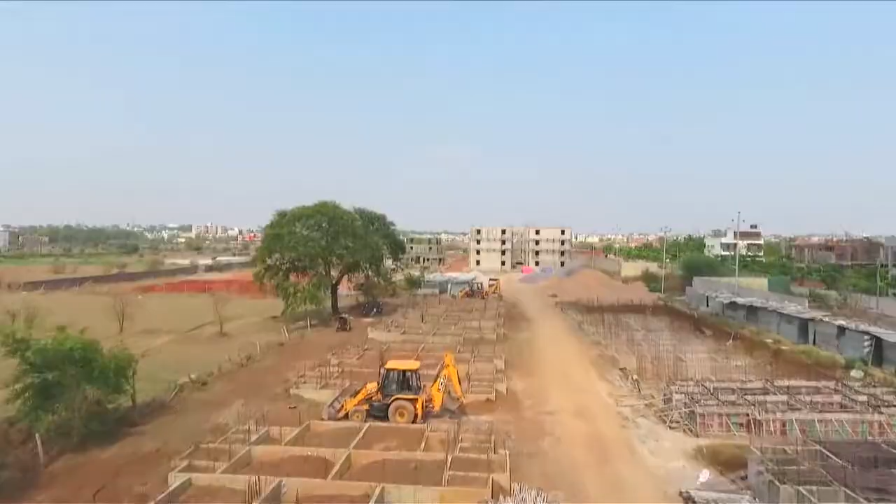BMTPC, under Performance Appraisal Certification Schemes, has evaluated these systems in different forms and issued performance appraisal certificates to various agencies. With more and more construction agencies getting equipped with manufacturing capability and developing their trained design and construction teams, the field is open for healthy competition for the state governments and other agencies to adopt these viable technologies for their projects.